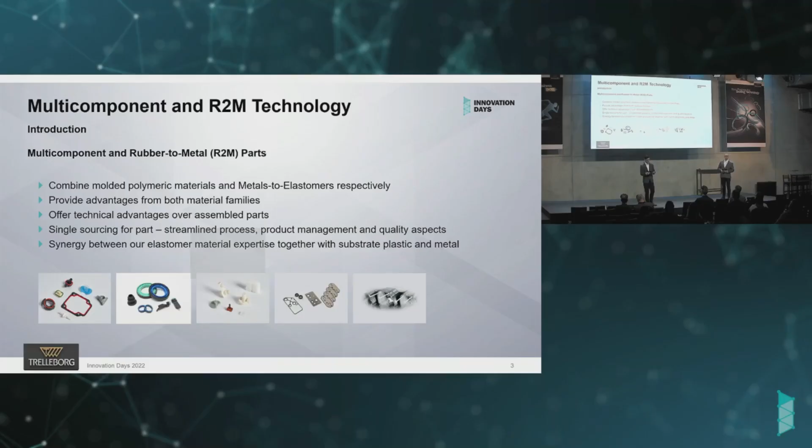So manufacturing technology is quite intensive for these types of parts. Why do we go for maybe more complicated and advanced processes here? When you think that we produce single component parts, rubber only parts, you need to think that these need to be assembled in the hardware in order to function and perform the sealing functionality. For different reasons, that assembly might not be possible or simply would not provide the function required out of the seal throughout its lifetime.

In such situations, multi-component and rubber-to-metal products can provide the technical lead required by such applications. Together with this come also the advantages of having a single source for what could potentially have been multiple manufacturing sites providing different parts. Given the logistical nightmares we've seen in recent years, this could be a good winning point. Also, we have to think about product and quality management being streamlined through one production facility for multi-component and rubber-to-metal parts.

And just to give you a definition of rubber-to-metal parts: it's also a combination of a few elements. But in this situation, we are talking about metal that is chemically and mechanically treated, and the elastomer that is bonded to the metal during the molding process.

At Trelleborg, we have various sites where we do our production of multi-components and rubber-to-metal parts. Multi-component part production is subdivided by virtue of the elastomer being used. So if it's LSR, it's Stein am Rhein, Pernik, and Delano. For TPEs, it's Delano, Streamwood, and Malta. And for thermoset multi-component parts, that would fall under Malta.

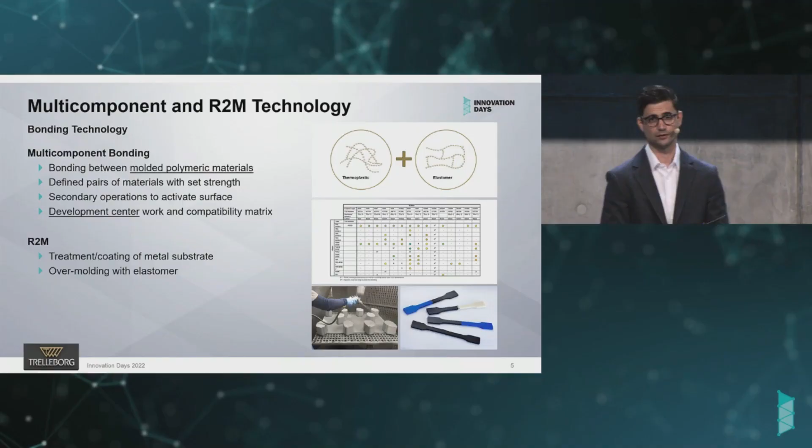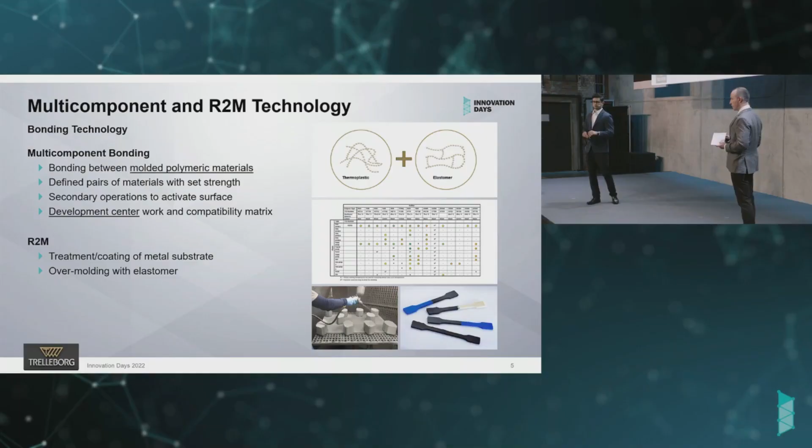Talking about bonding, we touch a very sensitive topic, which is the choice of proper primer agent, primer coating, because that literally invisible element in multi-component rubber to metal products sometimes decides about everything. If we choose a bad primer, bad bonding, we will fail. Even with the best metal and best rubber, the product will not transfer the principle of the design. That's why it's so important.

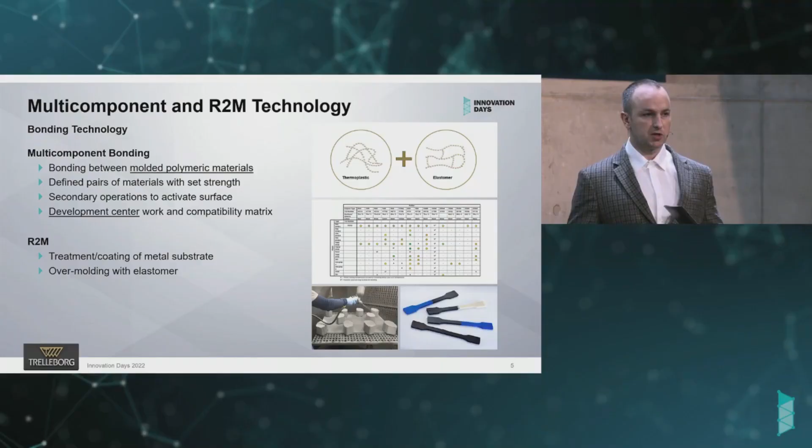Also, there is no open knowledge on the market, so we need to constantly work on new combinations, new primers, new polymers, and polymers are changing. There are some alternatives, we're changing some ingredients in the polymer. That's why we always need to keep an eye on these elements and choose the best connection of rubber, substrate, and primer.

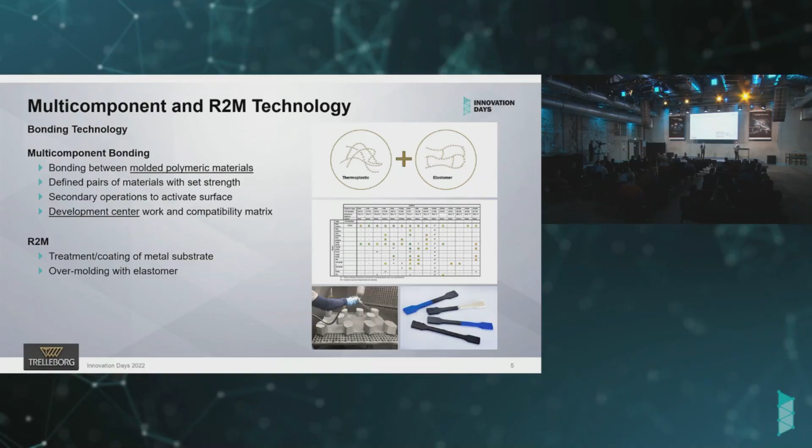For multi-component parts making use of LSR, the story is a bit different, mainly because the bonding agent is typically added to the polymer itself rather than through an external process. So normally this bonding agent is enough to get a good bonding response with the different plastics in use.

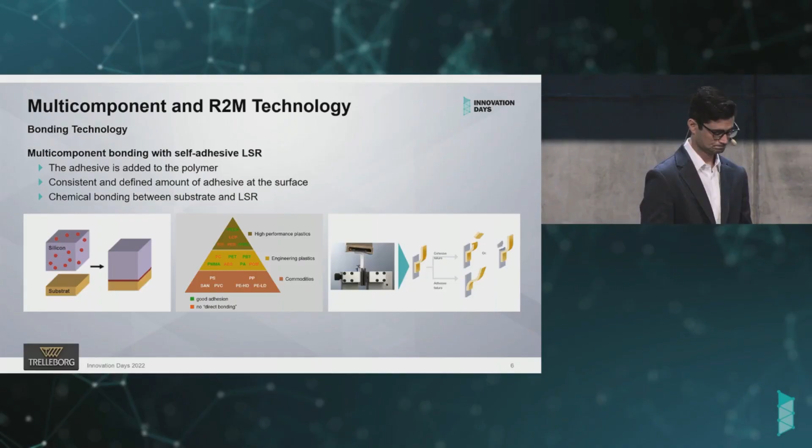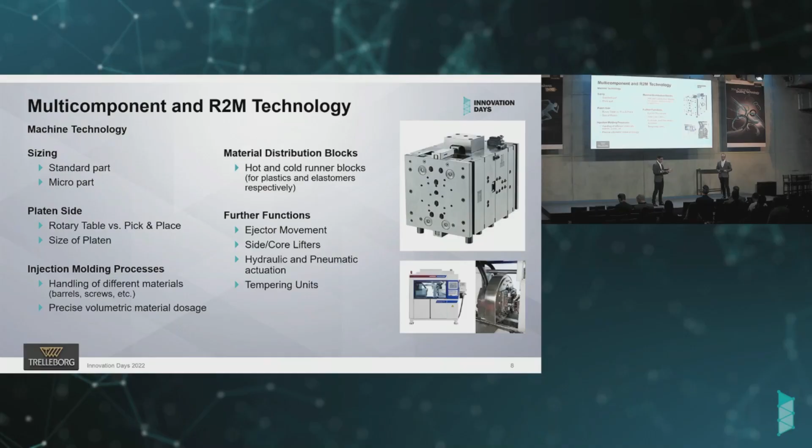It is also important to see how the part will be moving from one side of the tool to the other - if it's going to be a rotary type of tool or a pick and place mechanism, because these will require different machine capabilities.

Material is very crucial, so the machine screw and injection unit has to be tailored for a particular material. When materials are particularly aggressive, the metal of choice has to be different than for conventional materials, and specialty coatings are sometimes added.

A number of projects also make use of what we term a material distribution block. Its main purpose is basically keeping the material in a safe environment until it is injected into the final location, into the final tool.

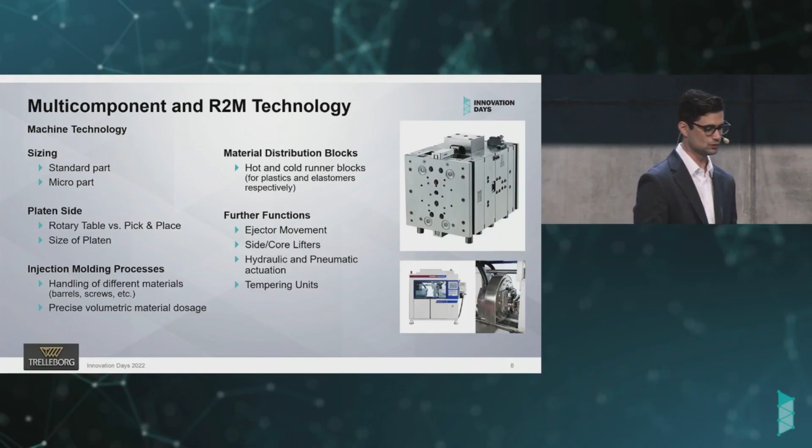Functions that one would typically associate with a tool are often actuated through direct machine functions. Systems which demold parts, assist with venting, and even maintain correct temperatures within the tool are all very closely linked to the machine capabilities.

Okay, right now a few words about the tooling. That topic is really deep, so we'll just touch the surface. But with that new tooling capabilities, we address many problems and challenges we used to have with the old, or let's say conventional standard capabilities, where you use injection or compression molding, so you need to deal with some waste, with manual handling, and all of this internal transport, so also the cost.

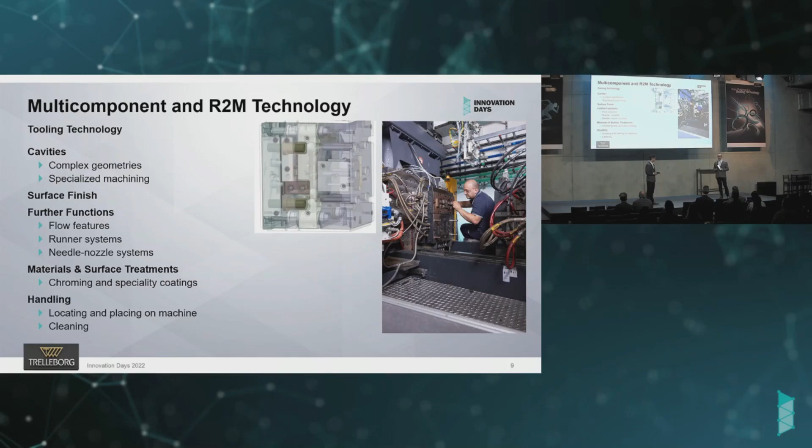This is a great benefit, I think, for everybody. And also the product that comes out of the tool will be called flashless. Of course, there is not something like truly flashless, because if you have the parting line, there will always be some flash. But you are able to minimize that flash so hard that it will always be below even very strict customers' limitations.

A special mention with regards to automation has to be dedicated to part handling. Different products will have different geometries, of course, and different features requiring specific adaptations for their handling. We consider our part handling device, which we call the end of arm or end of tool, as an integral part of the tool, because as much as the tool is catered for one part, so is the part handling device.

Part handling is very important when one considers that it will manage the movement of the parts from the tool, and has the potential to be used as well for inspection stages, for testing the parts in line with the process, and also for packaging the parts before shipment.

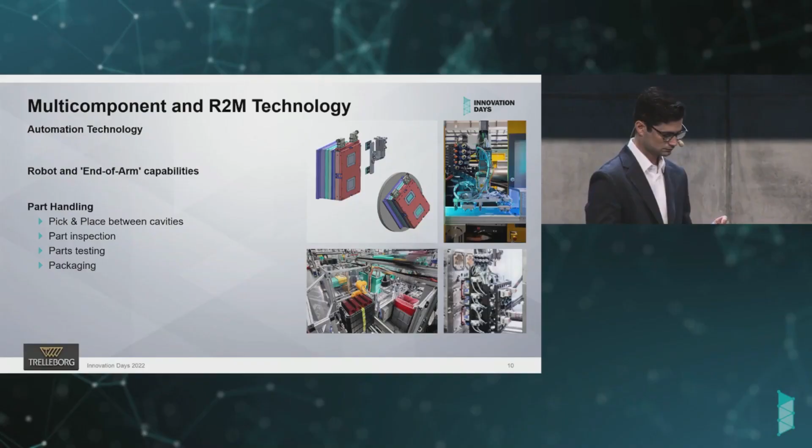So concluding, we are able to manufacture parts in a continuous flow, starting from the rubber strip or the pellets of plastic, ending with the final product produced in a fully automated way. So we skip off every internal transport. There is no waste, there are no stoppages. Also, we can minimize the influence of the human factor, the errors that come from humans.

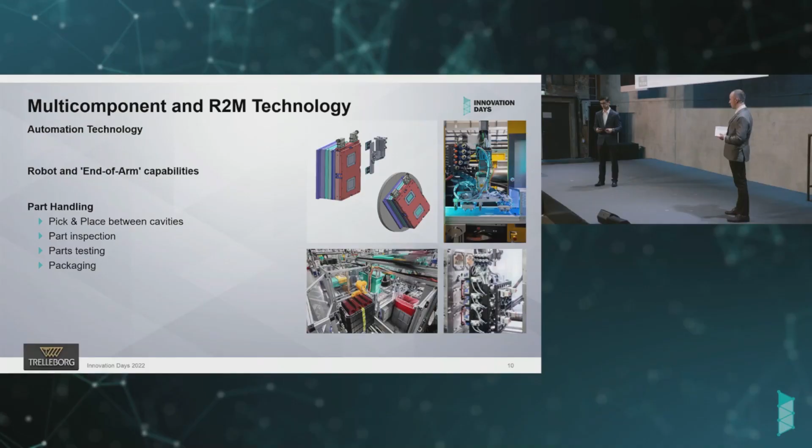We are also able, for instance talking about rubber to metal parts, to position metals in the tool vertically. Using magnet elements, metals stick to those magnet elements, and we can use, for instance, horizontal machines. Using horizontal machines, developing the automation is much easier, it's much cheaper. You have a big field of different solutions. Instead, working on vertical tools that are mainly used for metal parts, there are many more complications, and cost, to end up with efficient automation.

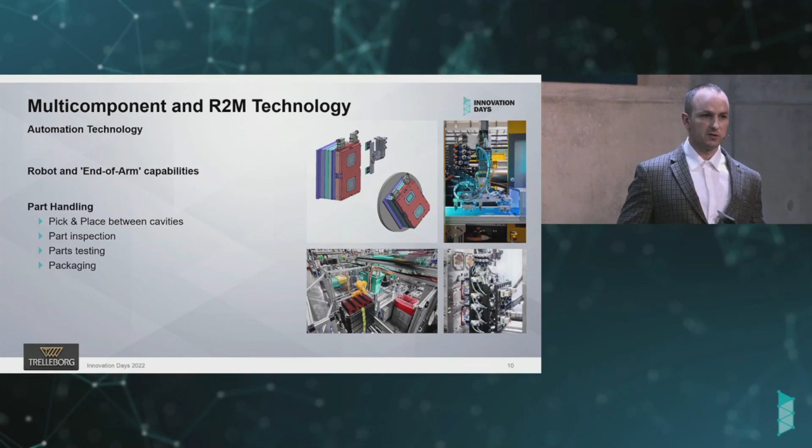Okay, so right now is the time to wrap up a little bit what we already said. Let's focus on the benefits that advanced manufacturing capabilities bring. Our goal was to show you the principles of that approach, to highlight the innovation approach and how many features that approach brings, and the cutting-edge technologies behind what we present.

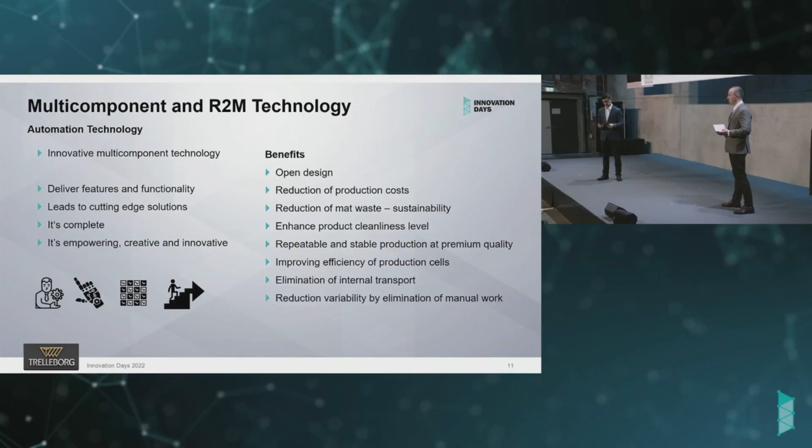Getting back to the questions we raised at the beginning, why we need those new capabilities, I think right now with that knowledge we can answer: with these advanced manufacturing capabilities we are focusing on the area that is also in the field of interest of the customer, because we are able to decrease the part price, we are able to assure best quality, and also when it comes to sustainability and waste of material, you can skip all the waste and just deliver the amount of rubber the part needs. So I think those three elements are very crucial here.

Correct. So very much at Trelleborg's heart, there is of course innovation and continuous improvement on processing. And I want to spend a word on our product development centers.

As I speak, we already have a product development center up and running in Malta for multi-component plastic and rubber products. But in our pipeline, we have other product development centers. For LSR processing, we will be having a product development center in Stein am Rhein. For rotary seals, we will have capabilities in Torino, and for rubber to metal parts, we'll have Čakovice with their own product development center as well.

We're just starting with our development center, but we'll be focusing on the areas we mentioned today, so compliance, reducing the cure time, and we'll also be working on the first small prototype tools, so to have shorter time and to answer to the customers as quick as possible.